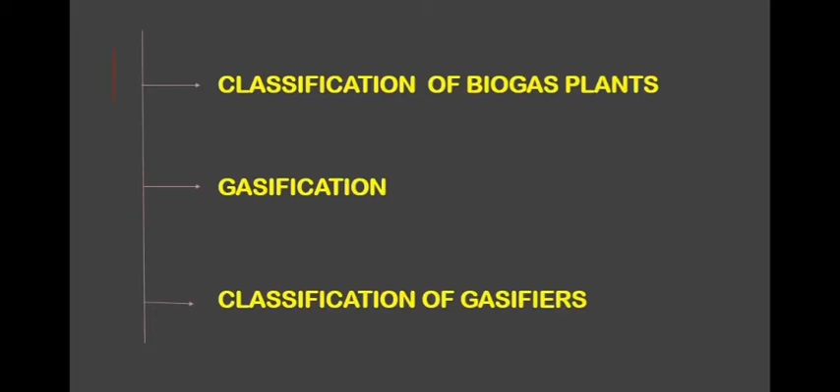In this lecture, we are mainly discussing classification of biogas plants, gasification, and classification of gasifiers. Before that, we want to know what is biogas and how it is generated.

Generally, biogas is a mixture containing 55 to 65% methane, 30 to 40% carbon dioxide, and the rest being impurities like hydrogen, hydrogen sulfide, and some nitrogen. Biogas can be produced from the decomposition of animal, plant, and human waste. It is a clean but slow burning gas and has a calorific value between 5000 to 5500 kilocalories per kilogram.

It can be used directly in cooking, reducing the demand for firewood. Moreover, the material from which the biogas is produced retains its value as a fertilizer and can be returned to the soil. Biogas has been popular under the name gobar gas, mainly because cow dung has been the material for its production. It is not only the excreta of cattle, but also piggery waste as well as poultry droppings are very effectively used for biogas generation.

A few other materials through which biogas can be generated are algae, crop residues (agro waste), garbage, kitchen waste, paper waste, seaweed, human waste, waste from sugarcane refinery, wastewater, etc. That is, any cellulosic organic material of animal or plant origin which is easily biodegradable is a potential raw material for biogas production.

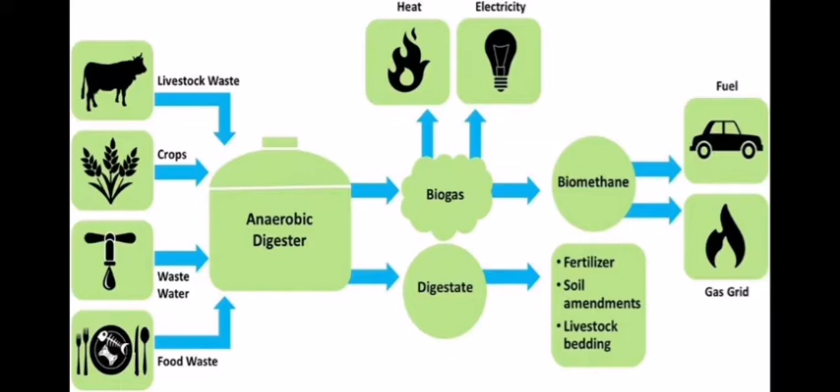Biogas can be produced by a number of ways, which we already discussed. Some of the methods are digestion, pyrolysis, or hydrogasification. Digestion is a biological process that occurs in the absence of oxygen and in the presence of anaerobic organisms at ambient pressures and temperatures of 35 to 70 degrees Celsius. The container in which this digestion takes place is known as the digester.

Then we can discuss what is a biogas plant. A biogas plant is where the biogas is produced by fermenting biomass. The biogas plant converts the biomass into biogas by the process of anaerobic fermentation. The bacteria called anaerobes carry out digestion of biomass without oxygen and produce methane and carbon dioxide.

Biogas plants are very popular in India, particularly in rural areas. The raw materials used in biogas plants are animal waste, human waste, agricultural waste, industrial waste, etc. The main components of a biogas plant are digester, gas holder, inlet and outlet pipe, slurry mixing tank, gas outlet pipe, and the stirrer.

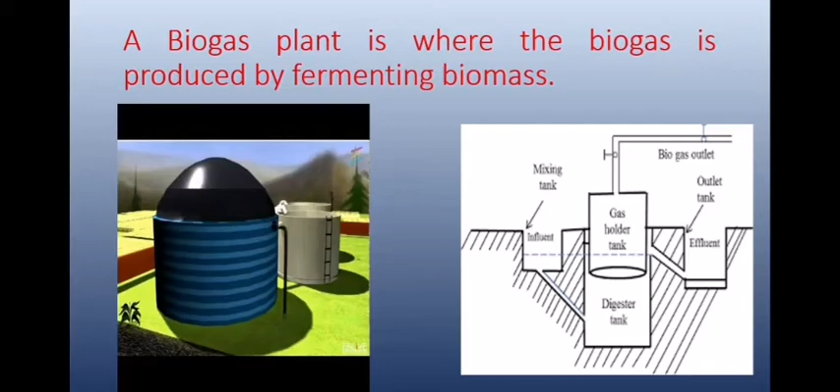We can classify the biogas plant into two main categories by the mode of working and the plant design. By mode of working, it can be classified into continuous type biogas plant and batch type biogas plant. By plant design, we can also classify the biogas plant into two: floating drum type biogas plant and fixed dome type biogas plant.

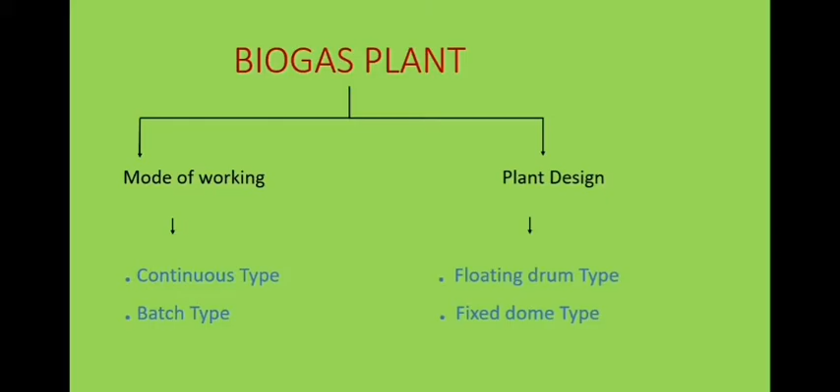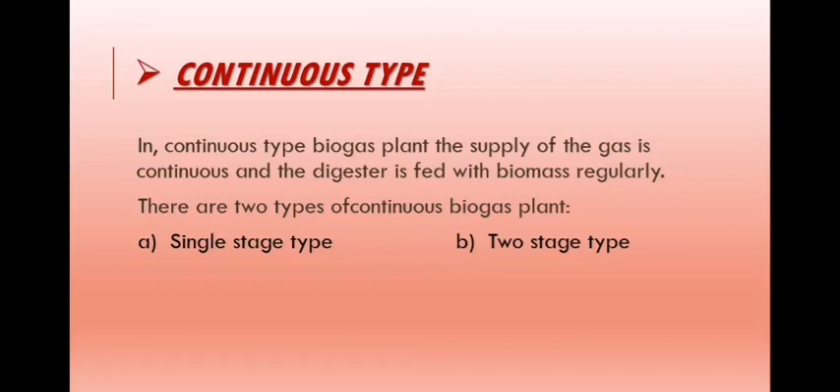In a continuous type biogas plant, the supply of gas is continuous and the digester is fed with the biomass regularly. They are also classified into two: single stage type and two stage type. In single stage type continuous biogas plants, the entire process of conversion of biomass into biogas is carried out in a single chamber or digester.

This chamber is regularly fed with the raw waste while the spent residue keeps moving out. The main advantages of this type of biogas plant are: simple in construction, it does not need skilled labor, it is easy to operate and control. These are preferred for small and medium-sized biogas plants.

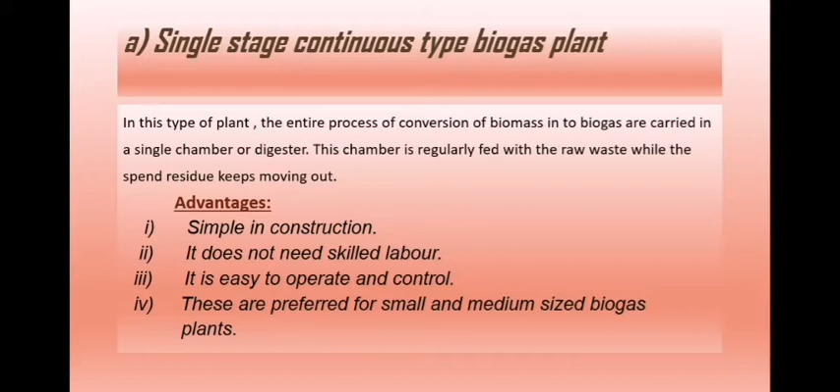The next type is two-stage continuous type biogas plant. In this type, two digesters for digestion of biomass are needed. In the first digester, the biomass is fed in which acid formation is carried out, and then only dilute acids are fed into the second digester where biomethanation takes place, and biogas can be collected from the second digester.

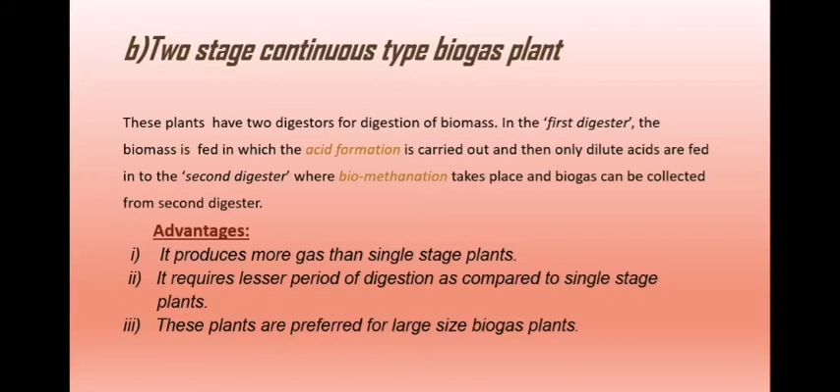The advantages of this type of biogas plant are: it produces more gas than single stage plants, and it requires a lesser period of digestion compared to single stage plants. These plants are preferred for large size biogas plants. The advantages of continuous type biogas plants overall are continuous gas production, less retention period, smaller digestion chambers required, and less problems compared to batch type plants.

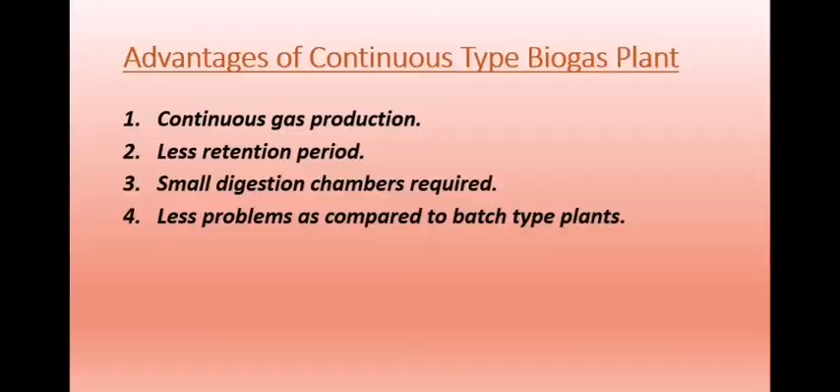Then we can discuss what is a batch type biogas plant. In a batch type biogas plant, the biomass feeding is done in batches with a large time interval between two consecutive batches. A batch loaded digester is filled to its capacity and given sufficient retention time, that is 35 to 45 days, for digestion of biomass. After the completion of digestion, the residue is emptied and filled again.

Gas production is uneven due to slow start of bacterial digestion, and to overcome this difficulty, several digesters are used which are fed and emptied in sequential manner. Thus, the regular supply of gas is maintained.

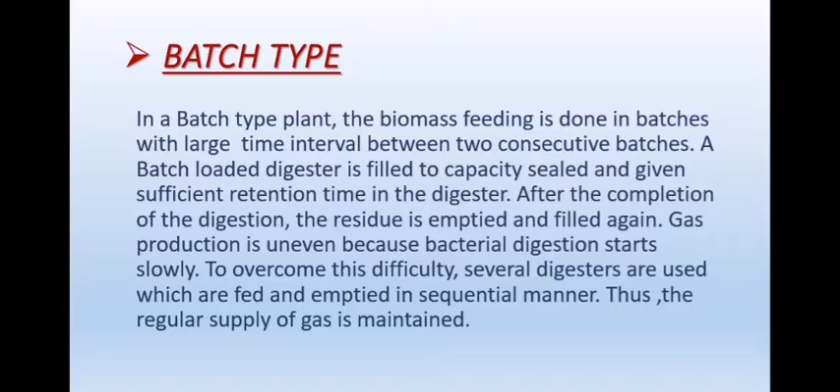The salient features of batch type biogas plants are: gas production is uneven. To get a continuous supply of gas, several digesters are required, which occupy more space. There is high initial cost due to the large volume of digesters, and addition of fermented slurry is needed to start the digestion process. It also has operational and maintenance problems.

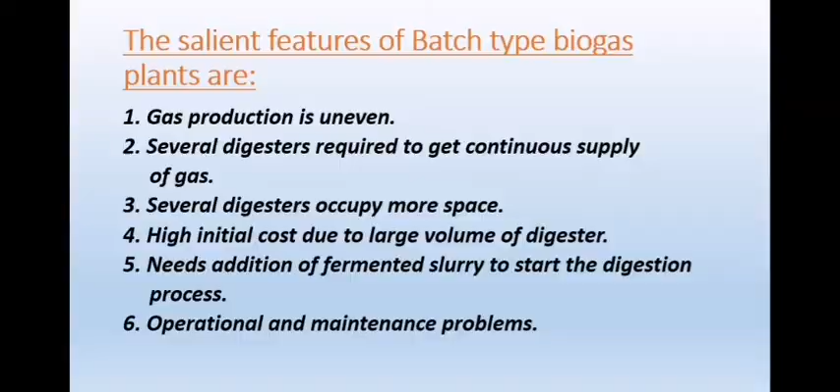By plant design, we can classify biogas plants into floating drum type and fixed dome type. In floating drum type biogas plants, the gas holder is separate from the digester. The Khadi and Village Industries Commission standardized this model.

It consists of an underground cylindrical masonry digester having an inlet pipe for feeding animal dung slurry and an outlet pipe for sludge. There is a steel dome for gas collection which floats up and down according to the quantity of gas accumulated. The drum may be of steel, ferrocement, HDPE or fiberglass.

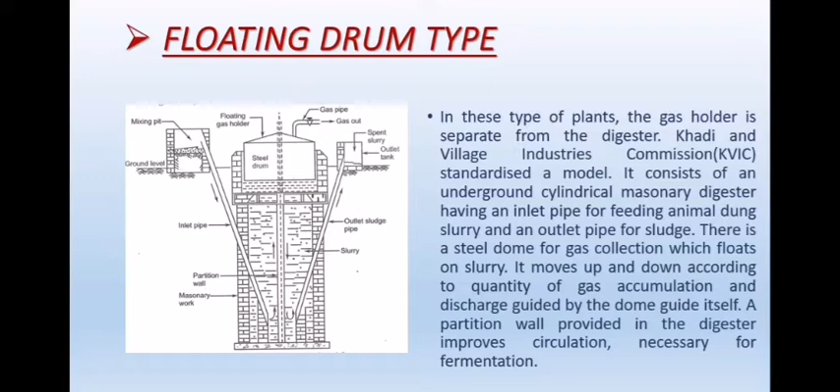The pressure of the gas in floating drum type biogas plants is always constant, equivalent to the weight of the gas holder over unit area. It can be increased by putting additional weight on the gas holder. The sides of the gas holder remain in the slurry to seal the leakage of gas to the atmosphere. The cost of this plant is more, as the cost of the gas holder itself is high, and it requires regular check and maintenance.

The KVIC plant is of steel drum type or floating gas holder design, in which digestion takes place in a masonry well and the drum floats as gas collects and is taken out from the top. This design was first developed and perfected in India in 1954. It was taken up for propagation in villages in 1962 by the Khadi and Village Industries Commission, Bombay. Therefore, it is known as the KVIC design.

In the KVIC plant, the gas is stored in a mild steel drum of 30 to 40% of plant size, at a pressure of 100 mm of water column built in the floating gas holder, which is sufficient to supply gas up to 100 meters. The drum in the KVIC model is the costliest component, and its life is comparatively less, about 10 years.

The advantages of this type of plant are: gas pressure is constant, less scum problem, no danger of explosion since there is no possibility of mixing biogas with external air, and no gas leakage problem.

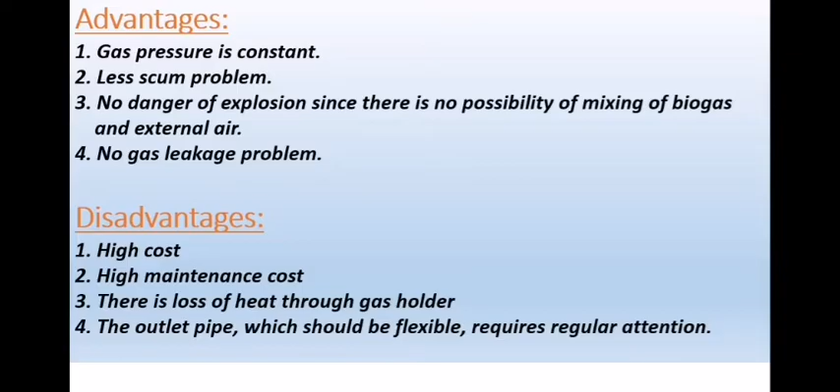The next type is the fixed dome type. Examples of fixed dome type biogas plants are the Janata biogas plant and the Deen Bandhu biogas plant. The Janata model biogas plant was first developed by the Planning, Research and Action Division, Lucknow, in 1978. It is an improved version of the Chinese fixed dome biogas plant. The plant consists of a foundation, digester, dome, inlet chamber and outlet chamber, mixing tank, and gas outlet pipe.

The foundation is the amply compacted base of the digester, made up of cement, concrete and bricks. Its construction is carried out so that it may provide a stable foundation to the digester walls and bear the full load of slurry filled in the digester. It should be waterproof so that no percolation or water leakage takes place.

The digester is cylindrical in shape, constructed with bricks and cement. It holds the dung slurry for a retention time so that biogas is produced from the slurry in the digester. It should be noted that the diameter to height ratio of the digester is kept at 1.75:1. It is sometimes also called the fermentation tank.

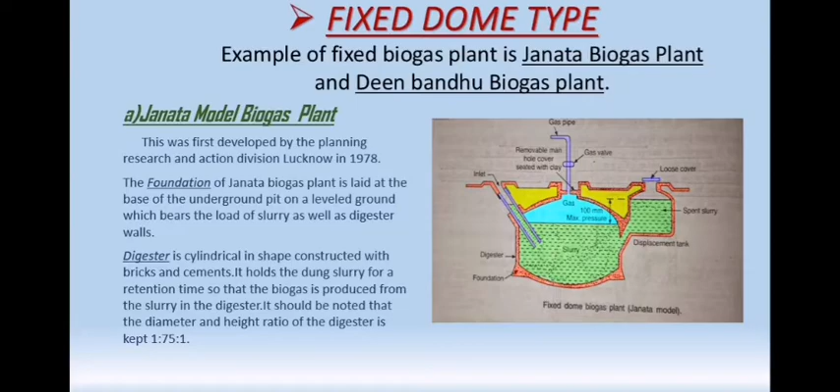Two rectangular openings facing each other are provided for inflow and outflow at about the middle of its height. The gas is stored in the gas portion, which is an integral part of the plant between the dome and digester, where usable gas is stored. The height of the gas portion, above the inlet and outlet openings to the beginning of the dome, is equal to the maximum volume of gas to be stored, that is 30 to 40% of the plant, and equal to the volume of slurry to be displaced at inlet and outlet.

The dome is a hemispherical roof of the digester, has a fixed height, and forms the critical part in the construction of the Janata Gobar gas plant. The gas gets collected in the space of the dome and exerts pressure on the slurry in the digester.

The inlet and outlet portions are constructed for putting fresh slurry inside the plant and to take the digested slurry out. The inlet and outlet are of larger sizes, provided on each side of the digester, facing each other. The discharge of slurry out of the plant is due to the pressure of the gas in the plant. Over the inlet portion, an inlet mixing tank is also constructed to mix the dung and water.

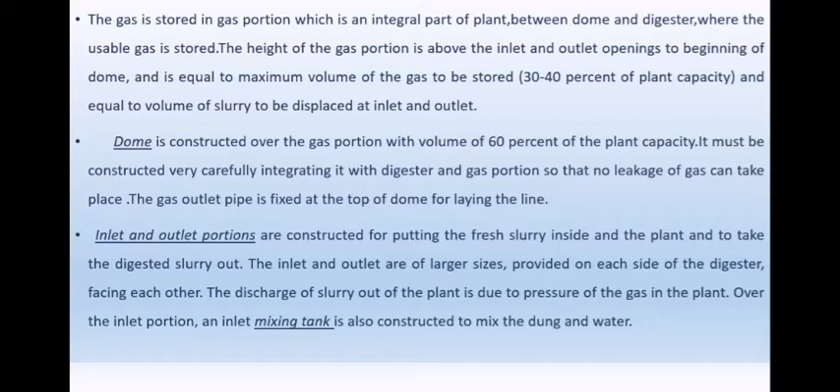The dung and water are mixed properly in the ratio of 1:1 to make the slurry, which is then poured into the inlet chamber. The gas outlet pipe is a small piece of GI pipe fitted at the top of the dome for conveying the gas to the points of use. A valve is fitted at its end to regulate the flow of gas to the gas connections.

The working of this plant: cattle dung and water are mixed properly in the ratio 1:1 to form slurry, which is then filled in the digester up to the height of its cylindrical portion. As soon as fermentation of the dung picks up, the generated gas starts accumulating in the dome. This gas exerts pressure on the slurry and displaces it into the inlet and outlet chambers.

Consequently, the slurry level in the digester falls and rises in the outlet chamber. This fall in the level of slurry continues till the slurry level reaches the upper ends of the inlet and outlet gates. After this, any further accumulation of gas would exert pressure and start escaping through these gates into the atmosphere.

The quantity of usable gas can be determined by calculating the increase in slurry volume in the inlet and outlet chambers. In the event of using gas, the slurry level in the digester rises while that in the inlet and outlet comes down. During the process, an approximately equivalent quantity of digester slurry is discharged from the outlet chamber through the outlet opening.

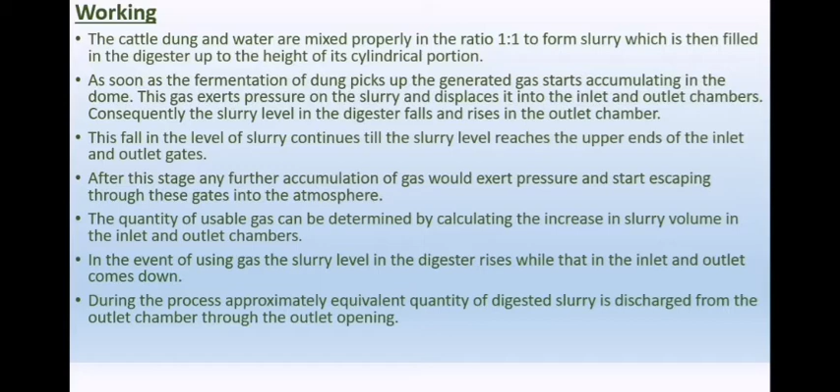The things to be noted while selecting the site for Janata model biogas plants are: the surface should be plane or even and be at a higher elevation. The site should be as far as possible near the cattle shed and the points of gas utilization. It should be at least 2 meters away from the foundation of the house or building.

Sunlight should be available during the whole day, round the year. The site should be at least 10 to 15 meters away from any water drinking source. There should not be any big tree near the plant whose roots may cause harm with the passage of time. There should be easy availability of water near the plant.

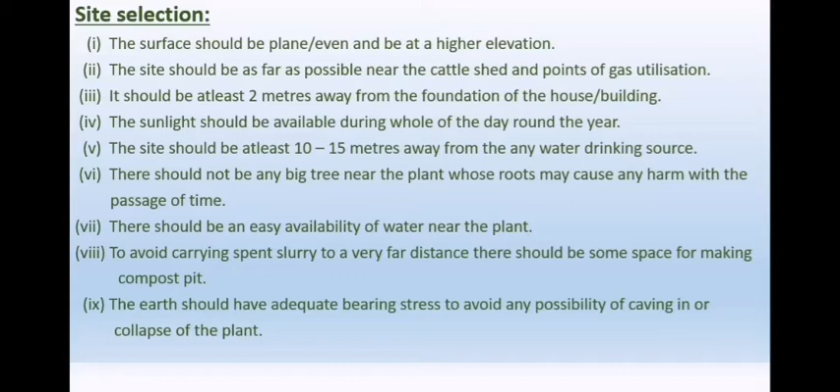To avoid carrying the spent slurry to a very far distance, there should be some space for making a compost pit. The earth should have adequate bearing stress to avoid any possibility of caving in or collapse of the plant.

The advantages of this type of plants are: no maintenance problems due to absence of moving parts, low cost, low operating cost, longer working life. Due to underground construction, heat insulation is better and therefore the rate of gas production is uniform during day and night. Quantity of gas produced is higher than movable drum type plants. No corrosion problem. Space above the plant can be used for other purposes.

The disadvantages of this type of plants are: variable gas pressure. Gas production per centimeter cube of the digester volume is less. Problem of scum formation. For construction work, skilled masons are required.

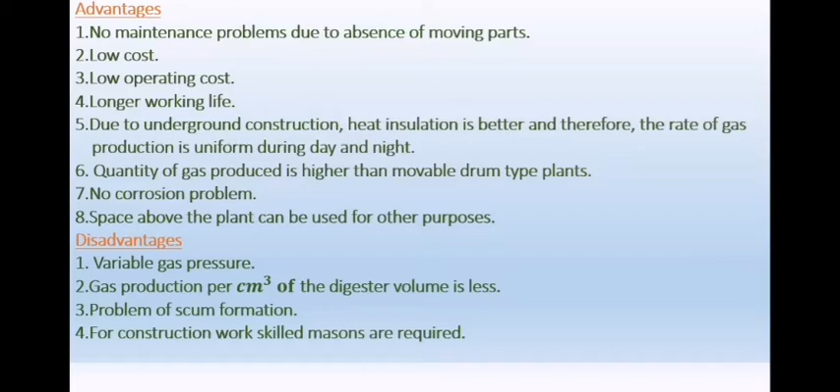Another type of fixed dome biogas plant is the Deenbandhu biogas plant. This is also a fixed dome plant, developed by the Action for Food Production, New Delhi, in 1984. It is a low-cost biogas plant, appropriate for all types of waste, and minimizes biogas losses from the inlet chamber.

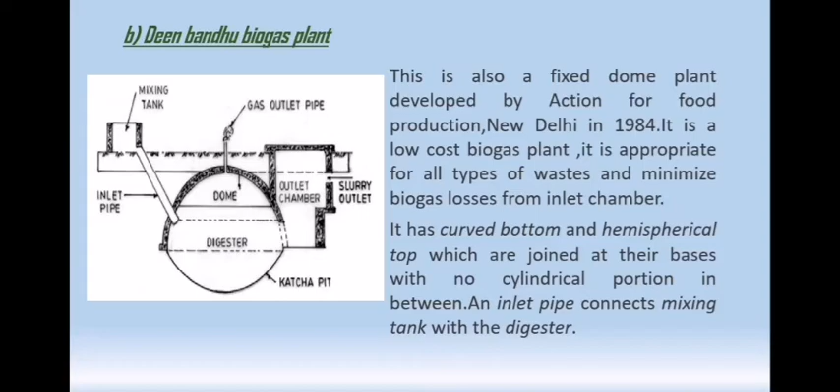The principle of working of this plant is the same as that of the Janata model, except for the configuration of inlet, entrance, and digester. It has a curved bottom and hemispherical top which are joined at their bases with no cylindrical portion in between. An inlet pipe connects the mixing tank with the digester.

The working of this type of plant: cattle dung slurry prepared in a 1:1 ratio with water is fed up to the level of the second step in the outlet chamber.

As the gas generates and accumulates in the empty portion of the plant, it presses the slurry of the digester and displaces it into the outlet displacement chamber. The slurry level in the digester falls, whereas in the outlet chamber it starts rising.

This fall and rise continues till the level in the digester reaches the upper end of the outlet opening, and at this stage the slurry level in the outer tank reaches the height of the discharge opening.

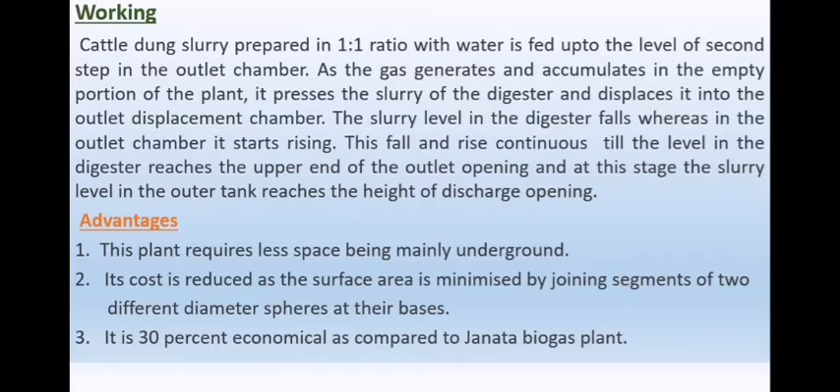The advantages of this type of plant are: it requires less space, being mainly underground. Its cost is reduced as the surface area is minimized by joining segments of two different diameter spheres at their bases. It is 30% more economical as compared to the Janata biogas plant.

Some other biogas plant designs in our country are: Khadi and Village Industries Commission design, Planning Research and Action Division design (a modification of the Chinese design), Application of Science and Technology to Rural Areas design, Murugappa Chettiar Research Center design, Tamil Nadu Agricultural University dome type design, Himachal Pradesh capsule design, Kucha-pucca model of Punjab Agricultural University Ludhiana, and Action for Food Production design, plug flow design, Roorkee design, mobile biogas plants, and Ganesh model.

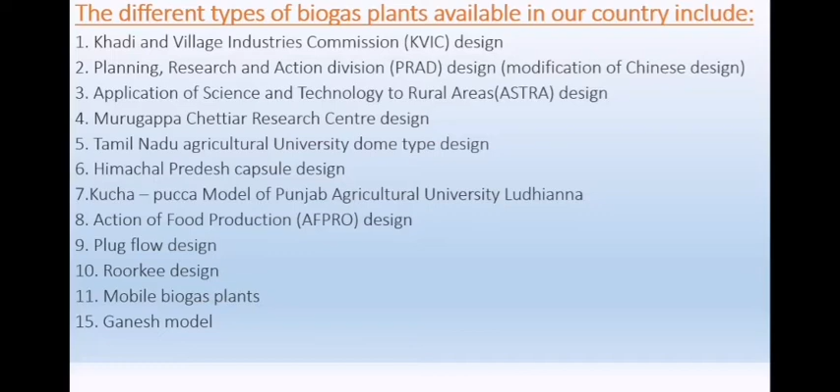The methods to obtain energy from biomass are combustion, anaerobic digestion, pyrolysis, hydrolysis and ethanol fermentation, and gasification. Gasification is a promising conversion technology that appears to be economically competitive with natural gas using biomass waste.

Gasification implies converting a solid or liquid into gaseous fuel without leaving any solid carbonaceous residue. This process is carried out in a gasifier, an equipment which can gasify a variety of biomass such as wood waste, agricultural waste like stalks and roots of various crops, maize cobs, etc.

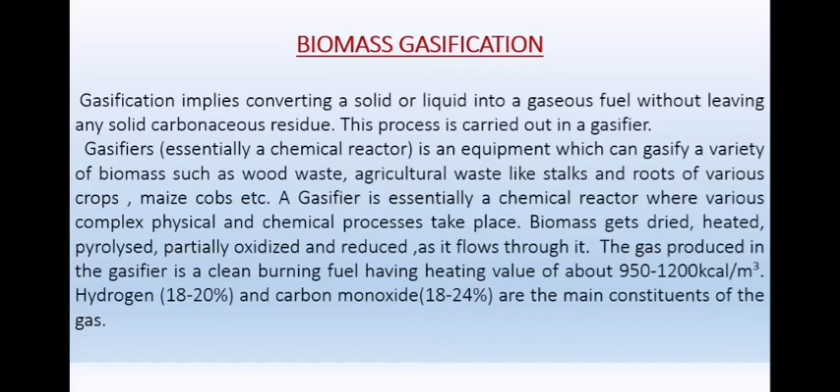A gasifier is essentially a chemical reactor where various complex physical and chemical processes take place. Biomass gets dried, heated, pyrolyzed, partially oxidized and reduced as it flows through it. The gas produced is a clean burning fuel having heating value of about 950 to 1200 kilocalories per meter cube. Hydrogen and carbon monoxide are the main constituents of the gas.

The advantages of gasifiers are: it is very easy to operate, its maintenance is easy, it is sturdy in construction and reliable in operation.

Why is gasification the best alternative? A diverse range of routes are available for conversion of biomass to various forms of energy. However, among all these alternatives, gasification is the best suitable because it offers high flexibility in terms of various biomass materials as the feedstock.

Gasification has thermochemical conversion efficiencies in the range of 70% to 90%, which is the highest among various alternatives. Gasification output capacity is controlled only by availability of adequate feed materials rather than other technical considerations.

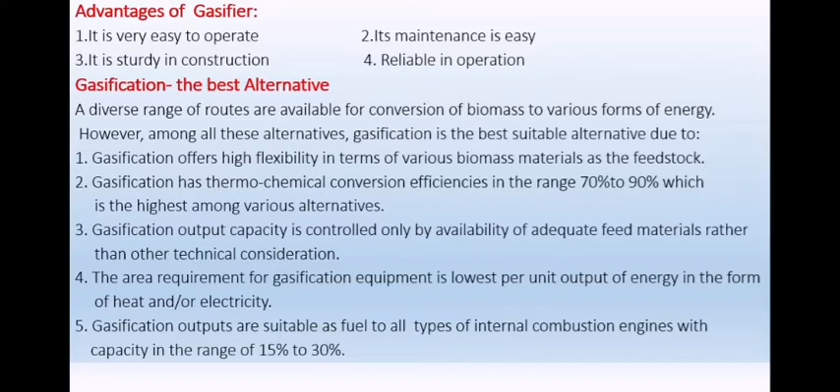The area requirement for gasification equipment is lowest per unit output of energy in the form of heat and/or electricity. Gasification outputs are suitable as fuel to all types of internal combustion engines with a capacity in the range of 15 to 30%.

We can classify biomass gasifiers into mainly three classifications. Gasifiers are vertical flow packed bed reactors through which oxygen or air for combustion is passed. It may be passed downward, upward, or across the bed. Depending on this, gasifiers can be classified into downdraft producer gas generators, updraft producer gas generators, and crossdraft producer gas generators.

By output power, gasifiers can be classified as small size gasifiers with output up to 10 kilowatt, medium scale gasifiers with outputs in the range of 10 to 50 kilowatt, larger size gasifiers with output in the range of 50 to 300 kilowatt, and very large gasifiers with output of 300 kilowatt and above. Gasifiers may also be classified as per the type of bed, that is, fixed bed gasifiers and fluidized bed gasifiers.

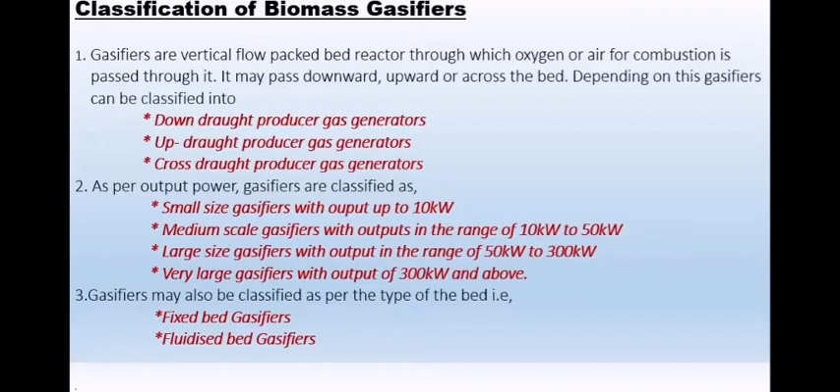We will discuss fixed bed gasifiers and fluidized bed gasifiers here. The fixed bed gasifiers are again classified into updraft or counter-current gasifiers, downdraft or co-current gasifiers, and cross-draft gasifiers.

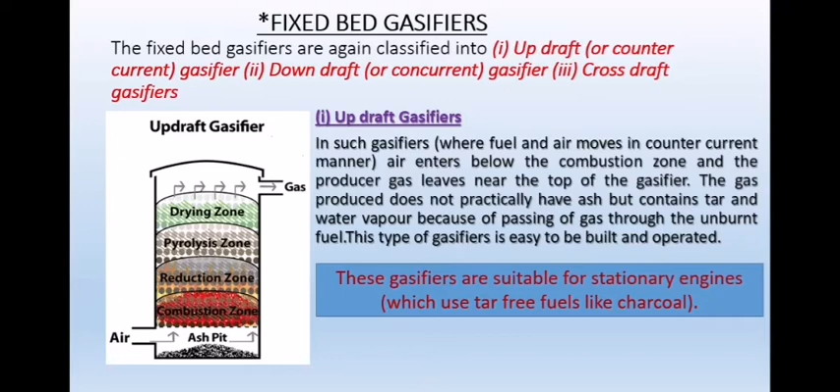In updraft gasifiers, the fuel and air move in a counter-current manner. Air enters below the combustion zone and the producer gas leaves near the top of the gasifier. The gas produced does not practically have ash but contains tar and water vapor because of the gas passing through the unburned fuel. This type of gasifier is easy to build and operate, and is suitable for stationary engines which use tar-free fuels like charcoal.

Downdraft gasifiers have fuel and air moving in a concurrent manner. Air enters at the combustion zone and the gas produced leaves near the bottom of the gasifier. Fuel is loaded in the reactor from the top. As the fuel moves down, it is subjected to drying at 120 degrees Celsius and pyrolyzed at 200 to 600 degrees Celsius, where solid tar, acetic acid, methanol, and water vapor are produced.

Descending volatiles and char reach the oxidation zone at 900 to 1200 degrees Celsius, where air is injected to complete the combustion. The products moving downwards enter the reduction zone, which is at 900 to 600 degrees Celsius, where the producer gas is formed by the action of CO2 and water vapor on red hot charcoal. The producer gas contains products like carbon monoxide, hydrogen, and methane.

It is purified by passing it through coolers. Tar is removed by condensation, whereas the gas produced contains less tar and more ash. These gasifiers are suitable for fuels like wood and agricultural waste.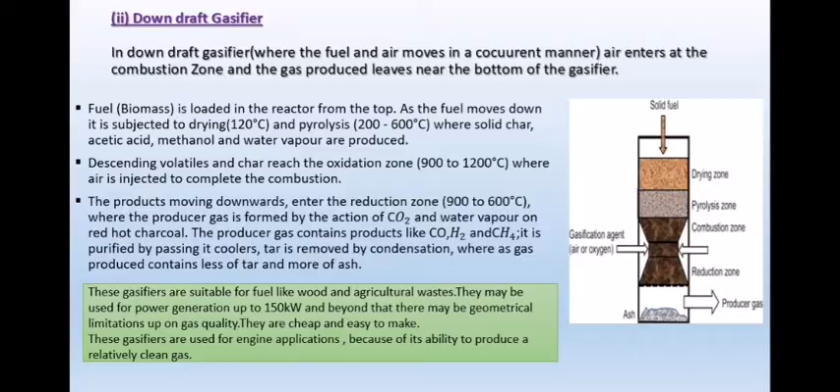The next type is cross-draft gasifiers. In this type, the gas produced passes upward in the annular space around the gasifier that is filled with charcoal. The charcoal acts as an insulator and a dust filter. Air enters the cross-draft gasifier through a water-cooled nozzle mounted on one side of the firebox. The gas is produced in the horizontal zone in front of the nozzle and passes through a vertical grate into the hot gas port on the opposite side.

Because of the short path length for the gasification reaction, these type of gas producers respond most rapidly to changes in gas production. However, the cross-draft gasifier is not commonly used. These gasifiers are suitable for power generation up to 50 kilowatt, but do not find much application.

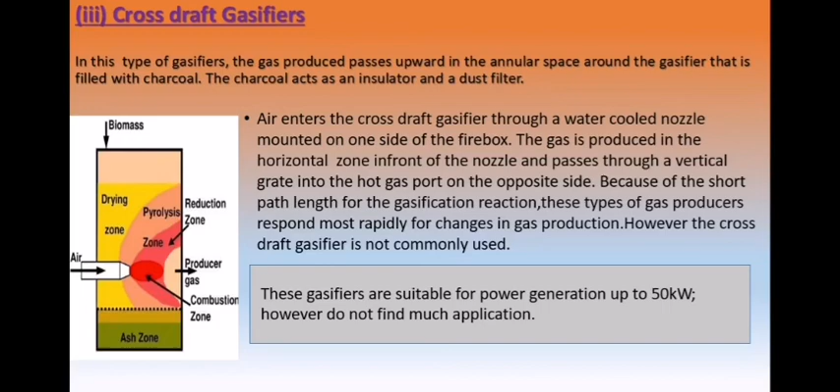The next type is the fluidized bed gasifiers. This is the most versatile type, and any biomass including sewage, sludge, pulping effluents, etc. can be gasified using this type of gasifier.

The performance of a fixed bed gasifier depends on fuel properties such as chemical analysis, volatile content, calorific value, size distribution, and ash characterization. But a fluidized bed gasifier is most versatile, and any biomass can be gasified using this type of gasifier.

It provides a means of burning any combustible material, from wet sewage, with high efficiency and minimal pollution. At the heart of the fluidized bed combustor is a hot bed of inert particles held in suspension, fluidized by an upward current of air.

The calorific value of the biomass is not a constraint. It can also handle biomass of high ash content, for example rice husk. The fluidized bed generally contains either inert material or reactive material, kept in a fluid state by the rising column of gas. Normally, the operating temperature of the bed is maintained within the range of 750 to 950 degrees Celsius.

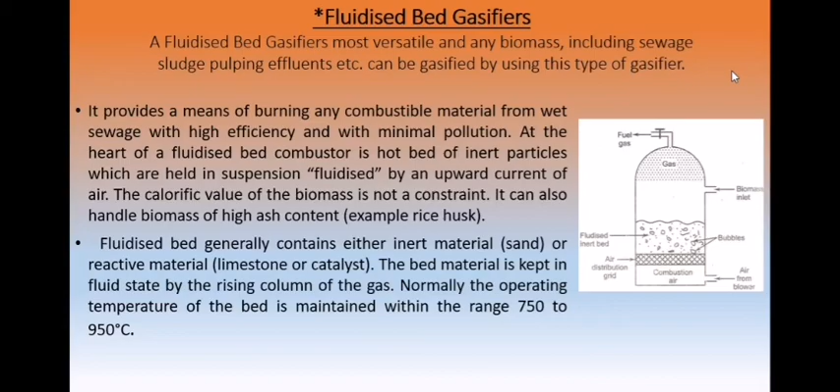The advantages of fluidized bed gasifiers are high heat storage capacity, simple operation, compact size, consistent combustion rate, high output rate, quick startup, fuel flexibility, the ability to use high moisture content fuel, uniform temperature throughout the furnace volume, and reduced emission of harmful nitrogen oxides.

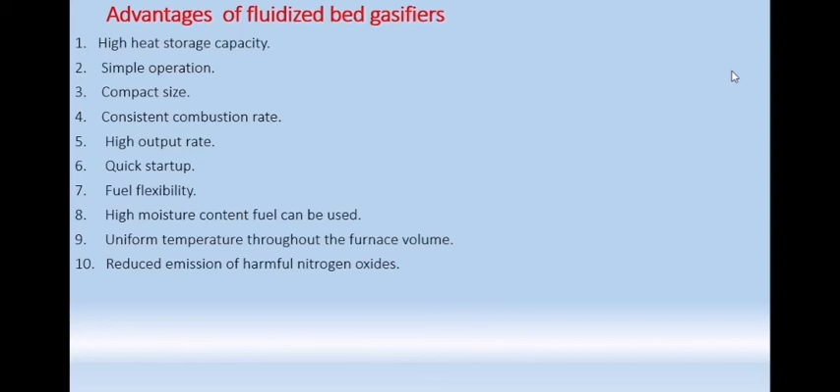There are many applications for gasifiers. Small size gasifiers find applications in rural areas, especially for providing shaft line power to agricultural pumps, processing machinery, and agricultural processing machines like straw choppers, etc.

Medium sized gasifiers can easily meet the shaft line power requirements of various rural industries like sawmills, carpentry workshops, mechanical fabrication, as well as small mills. They can also find extensive applications as a decentralized source of electrical energy in milk chilling, primary health coverage centers, and for rural electrification. The large size gasifiers can meet the shaft power requirements, directly or indirectly, of various industries like...

dairy, oil mill, mineral processing, brick manufacturing, ceramic and pottery industries, etc. These gasifiers can also be used in mining operations, forest-based wood processing units, well drilling, etc., and can be used for total electrification of small and medium-sized villages.

The other application is direct thermal applications. The primary application of direct heat gasifiers is to supply heat for cement manufacture, glass making, brick making, ceramic and pottery, rubber manufacture, food processing, brewing, crop drying, fertilizer production, and chemicals.